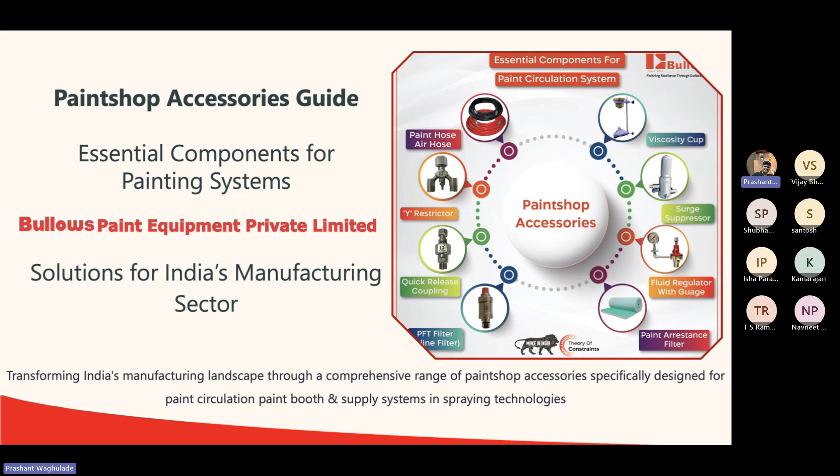The reason for covering these paint shop accessories in our fourth session itself is that this demand is increasing day by day. Fortunately, we have all made in India products available with us, which are not available today in the industry. We'll cover them one by one, but before going ahead, let's discuss why these accessories are required in the line.

These accessories mainly help when we look for precise flow of the paint. Especially when we get into automation, where the customer wants the measurement of the paint or the paint to be used precisely, there paint accessories play a very important role. The best five advantages of paint circulating systems are pressure management, flow control, filtration and contamination prevention, viscosity consistency monitoring, and ease of painting.

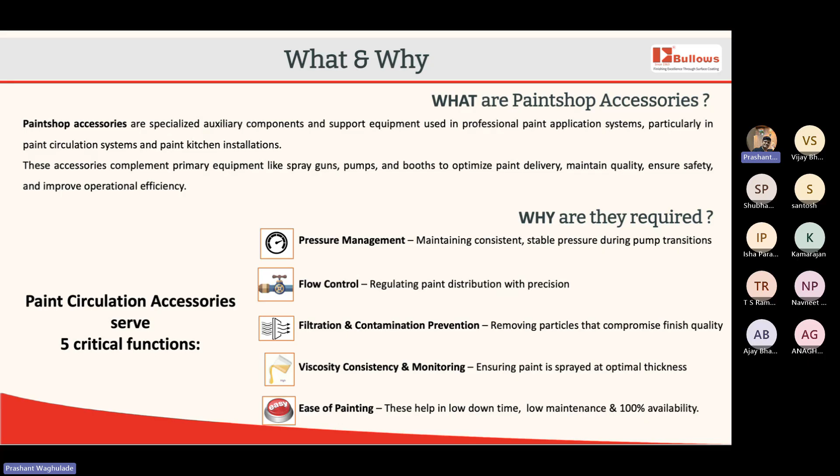Now, when I say paint circulating system, it simply means that the accessories used in a paint circulating system deliver this. That is the reason when we say what advantage we get with a paint circulating system, it is because of these five paint shop accessories.

Moving ahead, this is the typical paint circulating system, as we all are aware. We have taken one 3D snapshot where we have a container through which the paint will be dispensed through the diaphragm pump, and through the paint regulator it will go to the spray gun. This paint circulating system has piping involved in it, because paint is going to flow through the piping.

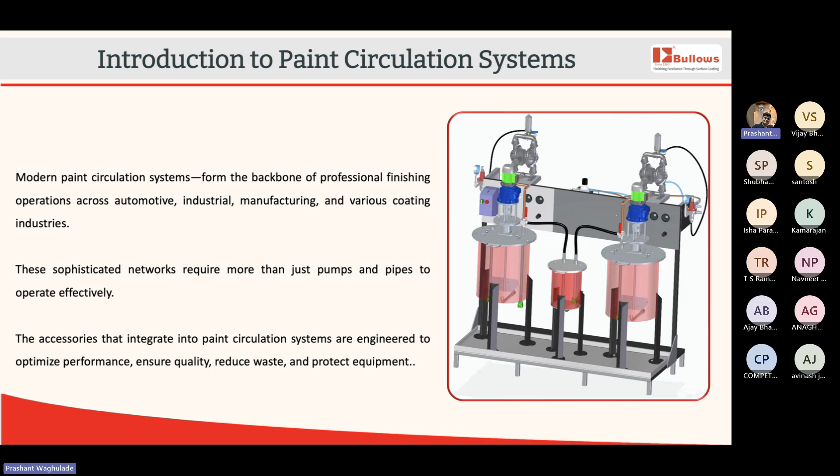When piping is involved and our paint has properties beyond those of water, in such cases we generally have chances of the paint getting blocked in the line, which directly causes increased maintenance or uncertain shutdowns. Nowadays, paint shop accessories have a huge demand in the automotive sector. But since paint circulating systems are also being adopted by general engineering customers, paint shop accessories demand is also increasing in the general engineering sector. A little bit of awareness about this equipment will definitely give business to all of us.

If we look at the trajectory of the paint shop accessories market in India, as of 2024 we have a 2.8 billion dollar market, only for paint shop accessories, which covers the small accessories required in paint circulating systems. This market is projected to approximately double by 2030. It's not exactly double, but a 4.6 billion dollar market, growing at 8% every year. So we should not miss this bus.

That's the reason we tried to cover this in our fourth session itself. Now, what we are going to have additionally and how we are going to capture this market, we are going to discuss. The first thing is, let us understand that when we have a single non-pressurized spray package, we have limited paint shop accessories. And when we have a recirculating system, the accessories required are a little bit higher.

Now, when we say non-pressurized spray package, in that case also you will see that there is an anti-surge, there is a paint regulator, and then it flows through the spray gun. Now when we have a regulator, we always allow the regulated flow with a regulated pressure to the gun. Whatever the operator does, the operator doesn't have to control the flow through the trigger, so it will be controlled through the paint regulator which we have used. So operator intelligence we are trying to reduce by using the paint regulator in this case.

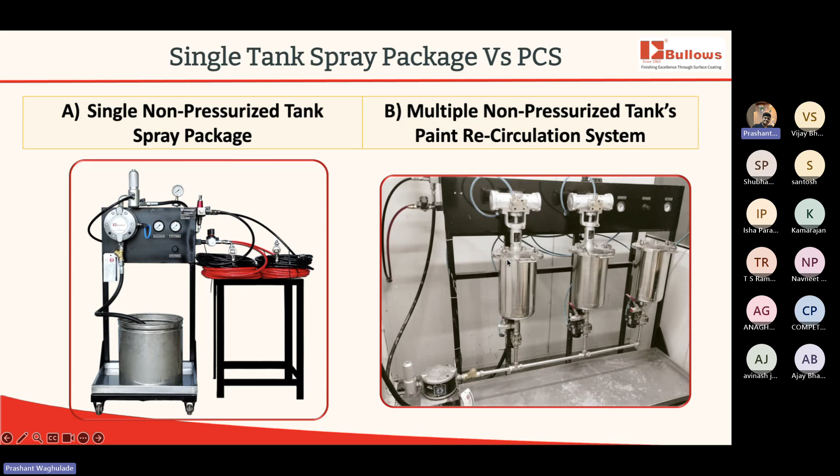Now when we say non-pressurized tank, general purpose paint, or whenever we have enamel painting, painting at a very raw level where 5, 6, 10 liters, 20 liters of paint are used, there we go for tank based, or the customer prefers to have a small package where they can just pour the suction hose into the paint and straight away start pulling the paint through a pump, and the spraying is done that way.

But when we say recirculating systems, generally recirculating systems are required where we have multiple colors, frequent change of colors. Let's take an example. Say we have a customer like Bharat Bijli or Siemens or Kirloskar, the companies who manufacture motors, induction motors. Now, in case of induction motors or Aqua pumps for that matter.

So what happens in case of induction motors, whenever a customer manufactures a motor, it has got wide applications across the industry. So the motor goes to power generation plants also. It also goes for agricultural applications. So, as I said, the motor has got wide applications. It naturally creates a number of customers for the motor manufacturer.

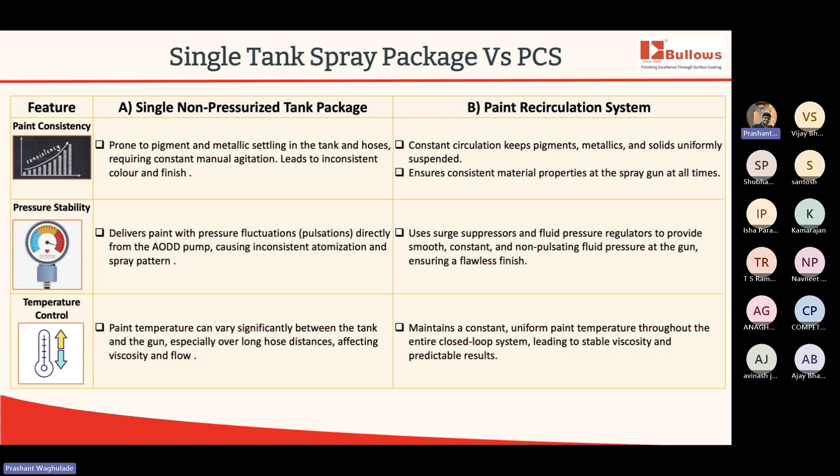So we just made a small distinction: if you have a customer who is using a package, there we have very little demand related to accessories. But when we talk about recirculating systems, we will definitely have a higher demand. Similarly, if we go ahead, we have created one band where you can see there are three types of customers for us in the market.

One is the band where we have a range of, say, 10 to 20 liters. Generally there the customers prefer to go for a pressurized feeding system with a single color naturally. If there is, say, 20 to 50 liters but single color, we generally recommend the customer to have at least a package, if not a circulating system. And then the bandwidth comes where people go for overall paint consumption of 50 to 100 liters, but with different colors also. So there we go for paint recirculating systems.

Now we have made this slide just so whosoever the dealers are present for this meeting today can understand where we are going to sell it exactly. So this would be your next question. Just to answer that question, one thing is clear: the accessories will be sold through either a new PCS or to the existing PCS as a replacement. For new PCS, you will have to find out the integrators like Patvin, Sural, and a number of integrators who make only paint kitchens or paint circulating systems. There you will supply new accessories to the integrator, and through the integrator to the customer.

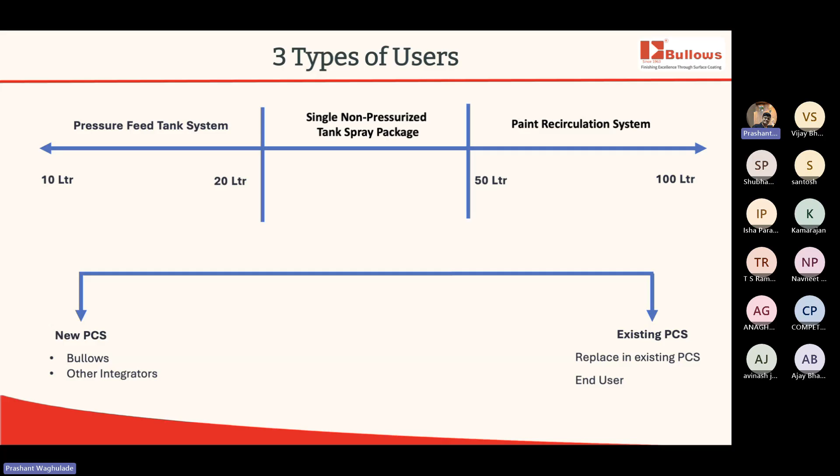In this case, we come into the picture, where we do have the availability of these accessories at our place. That is point number one. Secondly, since it is manufactured in India, the cost of spares is also economical for the customer, at least compared to what is installed on the line. So again, I am repeating, for all Bullows dealers present today, the major opportunities are where paint circulating systems are already installed. There we have a huge demand for replacing those paint shop accessories with a Make in India product where availability, consistency, performance and delivery, everything is available at one place.

We will just go through the accessories which are available with us. Anyway, this will be shared with you also, how it works, what is the benefit, so you'll be able to understand it in detail. At the same time, if any of you wants to understand more details about the accessories or wants to try with their customer, they can definitely get in touch with our sales team, Swami sir or Bhushan, so that they will be able to guide you, and we can also organize a common visit at the customer's place where you find good potential to sell these products.

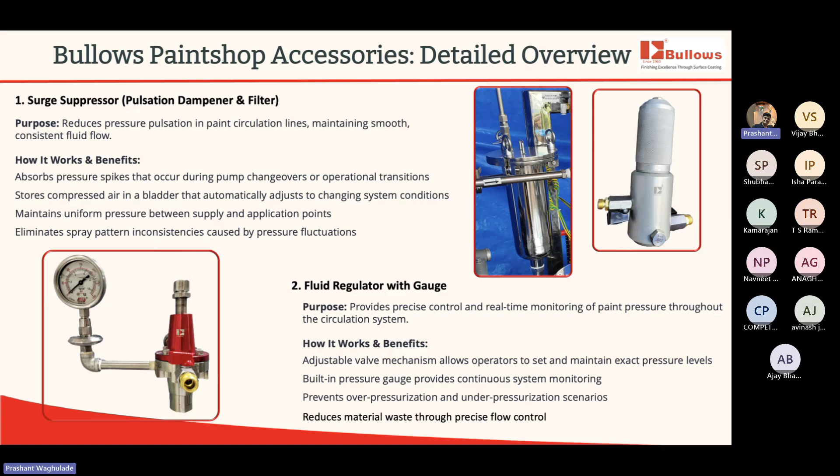So one of them: whenever there is a pump, there is a pulsation at the output end. In order to nullify that pulsation, we always have the pulsation damper or the filters at the end, so that the paint flow is ensured without any pulsation. After that, the second accessory available with us is a fluid regulator. This fluid regulator regulates the pressure of the flow. This definitely is going to help at the gun end, where the operator doesn't have to monitor it through the gun, but it will be set on the fluid regulator itself. That reduces the dependence on operator intelligence and gives you consistent output over a period of time.

Coming ahead, the very important product is the Y restrictor and QRC. I can give you a guarantee these products are not at all available in the made in India range. None of the manufacturers is available in India. So wherever you find QRCs for paint or the Y restrictor, those are either manufactured by Bullows or must be bought imported from either China or US or something.

So these QRCs are again a very fantastic item. You can easily replace them on the line at a very economical price with good margins. At the same time, these Y restrictors can also be done like that. Now I'll just brief you why these Y restrictors are required, because it is generally not used in paint recirculating systems very easily.

In paint recirculating systems, for example, your customer doesn't have much budget, but still he needs the recirculating line. In that case, we will not be able to give, say, the color change valve and all that, so recirculation is not possible. In that case, we can do the recirculation through the gun point itself by using the Y restrictor. This is the major advantage of this Y restrictor.

This can be used wherever we have, say, one or two or three color change applications. It can be easily connected with a QRC at this point itself so that you can straight away remove it from here and connect the thinner for, say, flushing purpose. So a very small but very useful tool for the customers and very useful accessory.

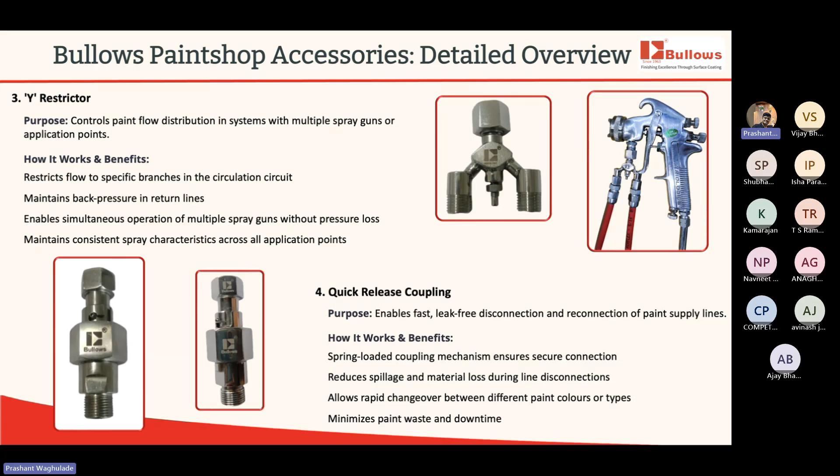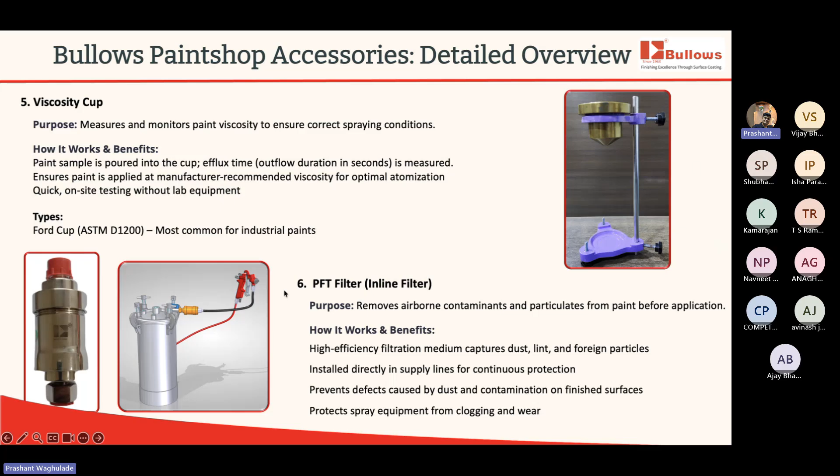If the interest comes from you all, we will definitely take it up with a detailed session and detailed demonstration of these products. There are a few items like, say, the viscosity cup, which all of us are aware of. Then the PFT filters, which are the inline filters, and this is also one of the accessories which is in huge demand not only across India but abroad as well.

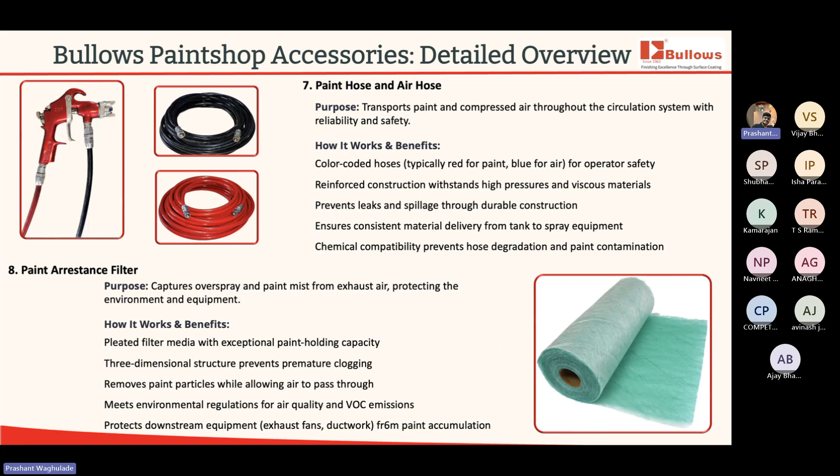Apart from that, one useful tool like your Y restrictor is the extension nozzle. This is also available with us with most of these spray guns. Whenever there are critical areas where the operator's hand or gun cannot reach, there we can use these accessories like the extension nozzle. Now this extension nozzle has got multiple angles.

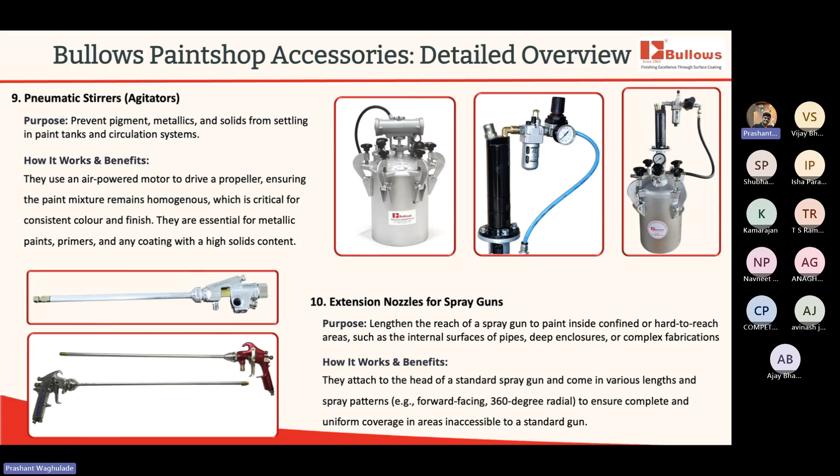You can get it in, say, radial degree, 60 degree, I think it is also available in 135 degree and 360 degree. So you can also do internal pipe coating for small diameters by using this kind of extension nozzle. And we do have extension nozzles up to 20 mm diameter. So the minimum dia of the pipe can be inner coated by using these spray guns.

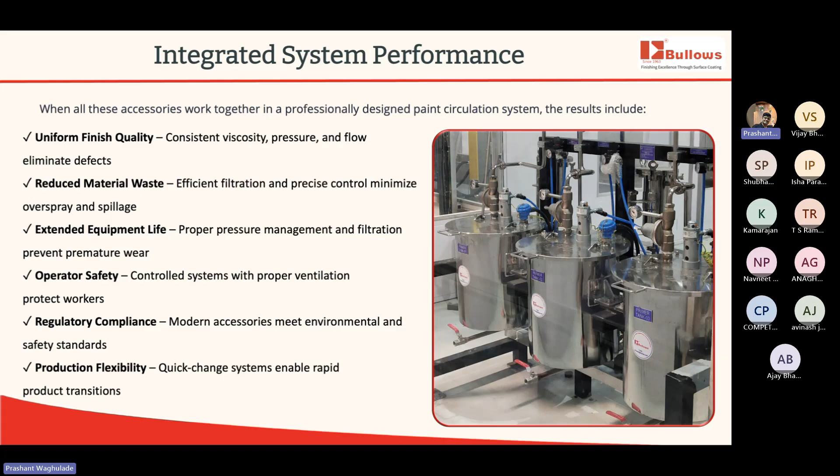Now, just to summarize one more time, these accessories are going to help any customer or any painting application in terms of uniform finish. It is going to reduce the material waste. So these are the points where we can justify ROI to the customers. Then the extended equipment life. Then we have operator safety, regulatory compliance, and production flexibility. So I think that's it.